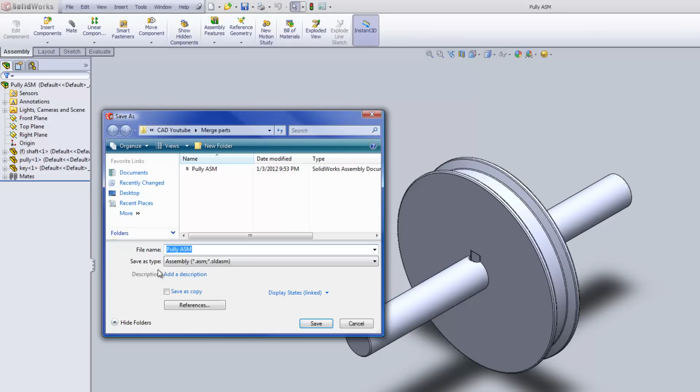So I'm going to go to File, and down to Save As. Now at Save As, there's either the assembly, which is what you would normally save an assembly file as, but you can make it into a part. There's also a lot of other options, but today we're just going to be dealing with the part.

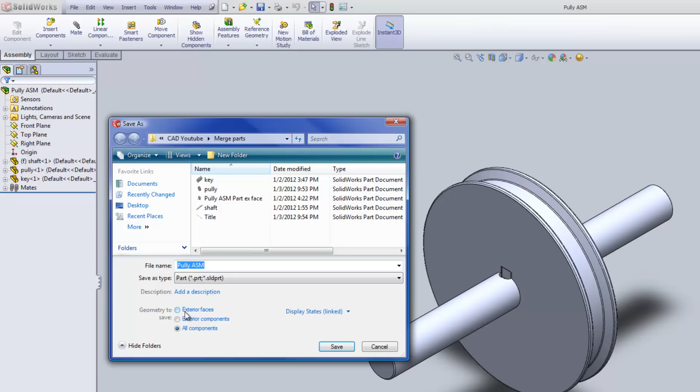Now in here you have a couple different options: geometry to save, exterior faces, exterior components, and all components. In this case, we're probably going to want to go with all components because it's going to make these into dumb blocks, essentially. Or exterior faces. Exterior components in this case, since we can see all the components from the three-dimensional space all around it, is really the same thing as all components.

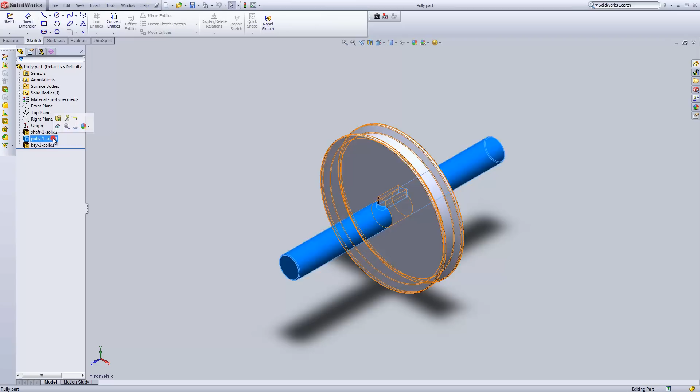So let me rename this part, and that'll save this assembly out as a single part file. Let me open that for you. So what I have now is a shaft, a pulley, and a key, but nothing explains how I actually got there. They're just dumb blocks, or geometry.

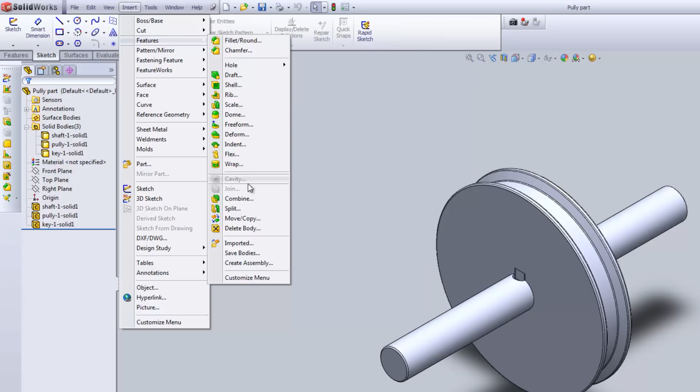Now maybe I want to take these and make them into a single solid body. To do this, you can either go to Insert, Features, and down to Combine, which will combine all the different bodies I click on here, and I click Add. But an easier way is to highlight the solid bodies right here, right click, and go down to Combine.

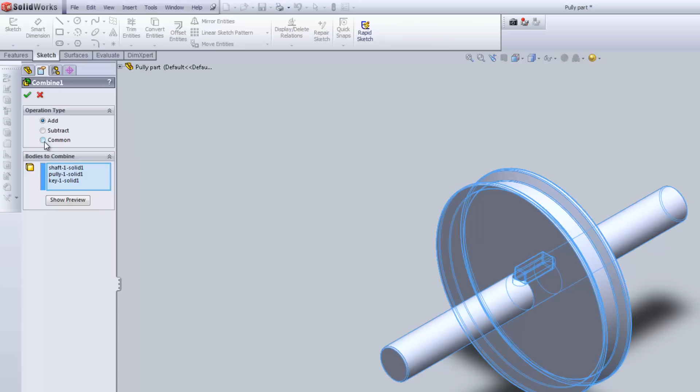Now in this case I want to actually add them together. I don't want to subtract them from each other, and I don't want to take the common geometry that they share. I just want to add them. So this combine feature makes these three dumb blocks into one solid body.

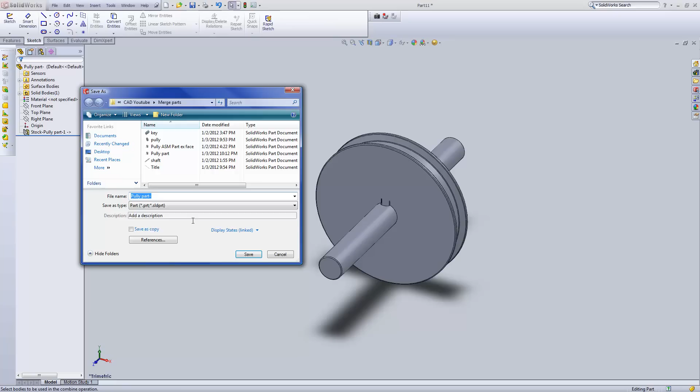Now I can right click on this and say Insert into New Part. So I can call this whatever. Now I have a single piece of geometry that encompasses my entire assembly. It's just one solid body, which can be a very secure way to share information with people outside of your company, or for whatever reason you have going on.

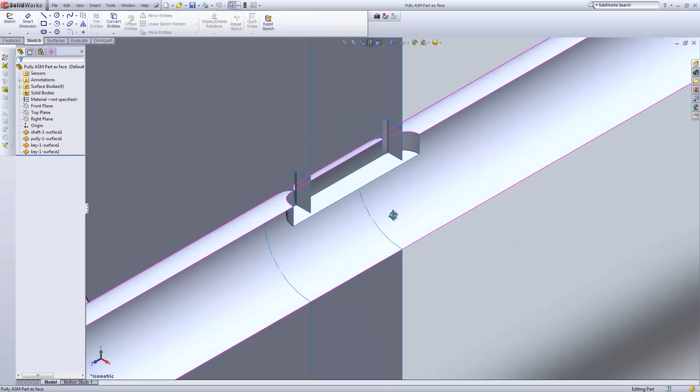Now I also want to show you what exterior faces is. I've already prepared this. So right here you have 4 faces, but when we split this, you'll notice that these are not solid bodies at all. It's just the exterior faces, which is another way to create a secure way to send information or load less data, whichever. It's another option you can explore.

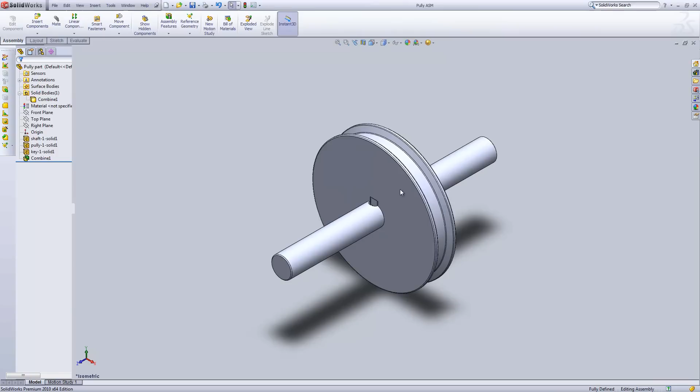But there is one thing we cannot do, and that is if we wanted to combine the solid bodies together, but they don't actually physically interconnect in our three-dimensional space, it's going to make it very hard—actually, it'll make it impossible—to combine these. Because you click on these 3 here, and say combine, and it gives you rebuild errors, because they do not intersect. They're disjointed solid bodies. So if you run across that error, that means your solid bodies are not physically connected.